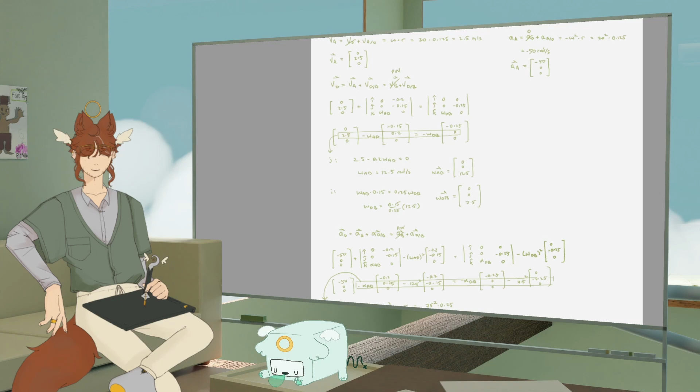Oh god, I went to go switch my scene and I almost turned off the stream. Oh hey Skrybl, what's up? POV: I legit just opened Twitch to see if anyone was on. You can always count on that.

3 p.m. damie stream, classic damie moment. Me going, I'm gonna stream at 2 today, and then I'm like, no it's gonna be 3 p.m. Whoopsies. That's why I don't have a stream schedule. I'm normal. Anyway, sorry for the green, the universe foretold it, that was my magic, I was casting magic.

I was doing this problem earlier because I goofed it really bad. Well, I didn't goof it that badly on my exam, but when I was doing it I was like dumb, or okay, dumb is maybe mean to myself, but I made a bunch of reading errors. I was reading it like this, setting up equations, and I was like, what was I doing, dude? Anyway, I did it, I think it's 175. I don't know if it's right or not, but I think it's that.

Anyway, that's not what we're doing, we're not doing green today. We're gonna do work and energy, which is fun, it's exciting. I think I'm gonna use like a brown pen. I'm trying to use more fun colors because I've been only doing like gray, that's boring. I can have any color I want, so we're gonna do that.

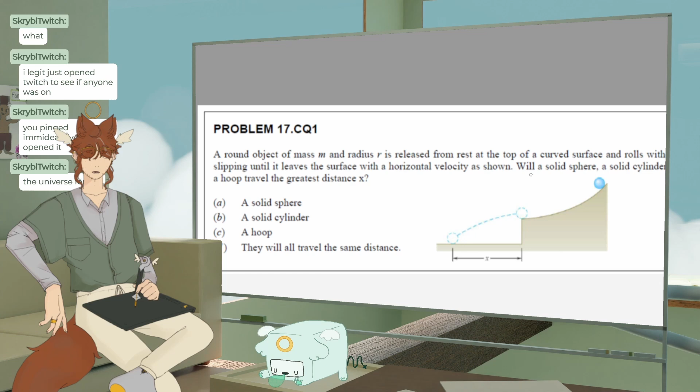Okay, so this is a question about moment of inertia. There's a couple things we need to know. There's going to be work and energy, so let's just write out the work and energy equation: delta T equals delta Vg plus u 1 to 2.

So there's no, oh god the battle music, there's no spring potential, right? No elastic potential, so we don't have to worry about that.

And we start, so let's just write this out: T1 plus Vg1 equals T2 plus Vg2 plus u1 to 2. So in terms of if we have different equations here, these are both going to be the same.

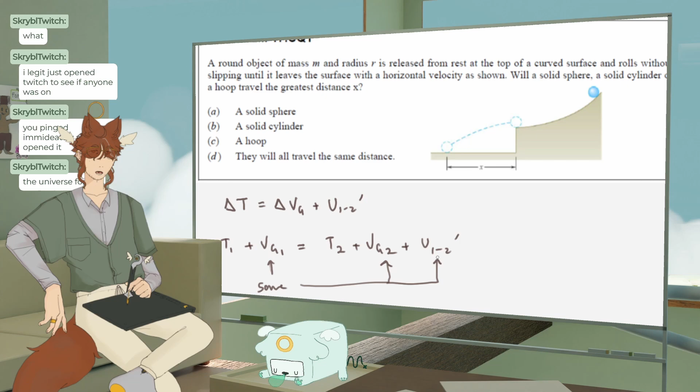This is going to be the same because they're just based off of mass, right? And they say a round object, so they have the same mass, all of them. And because they have the same mass, the friction is also going to be the same. We do have to know that there is friction because it rolls without slipping. That's the key bit there, because if it's rolling without slipping, it means there has to be friction.

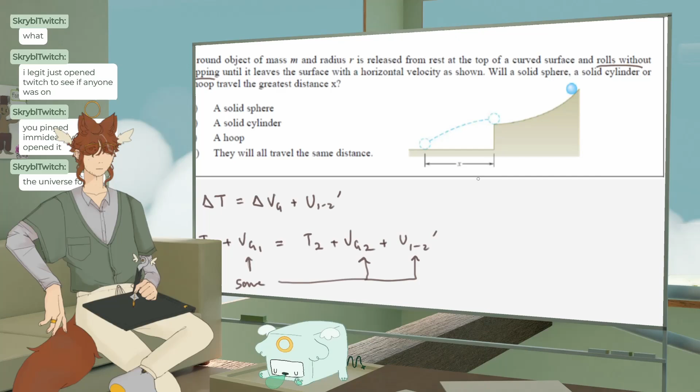So that means that leaves us with T1 plus, like, C equals T2. That's an I, T2, that's a C. What am I doing, writing. There we go. So T1 is going to equal 1/2 m v1 squared. Well, this is 0, okay, don't worry about that. So we have T2 equals C.

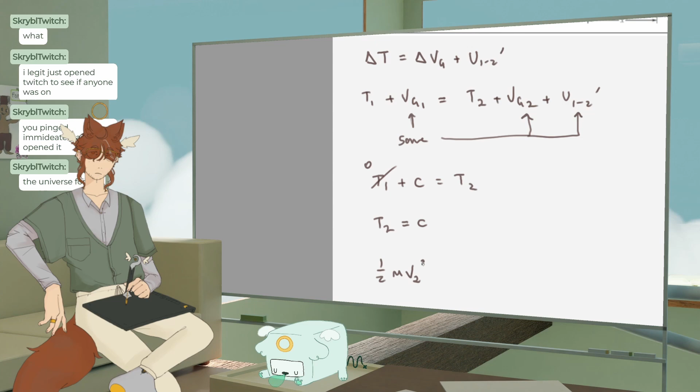This is our comparison, so whichever has the biggest T2 in terms of variables is gonna net us our thing. So we'll have 1/2 m v squared, v2 squared, plus 1/2 I bar omega squared. Let me check that.

Immediately an issue, I don't remember if there's an alpha in there. I want to say there's an alpha, I want to say it's I bar alpha omega squared, but I know there's an omega squared. This is like 1/2 m v squared.

One second, I'm checking my tome of books. Where are we at? I'm looking with my big eyes. No, it's just I bar alpha... I bar omega.

Yeah, because we don't actually care that much about accelerations in work and energy. Well, okay, maybe that's a lie. Yeah, no, that's kind of true, we care about velocities. Okay.

So these are all going to equal each other. So let's just say v2 squared equals... my mentality: if a program has been made to calculate this, use that. If not, make the program.

I made a program to help with this, it's really easy to make because it's just like algebra. I just use MATLAB and you can put in equations and stuff. But you still have to identify all your variables. In this case, this would probably be harder to do with a computer than doing it out, because you would have to do all this anyway to see what it would be.

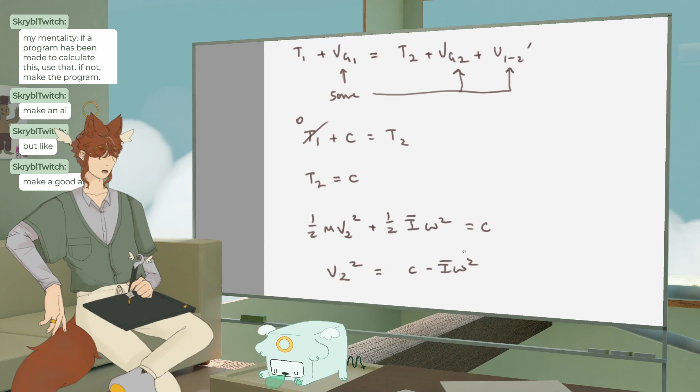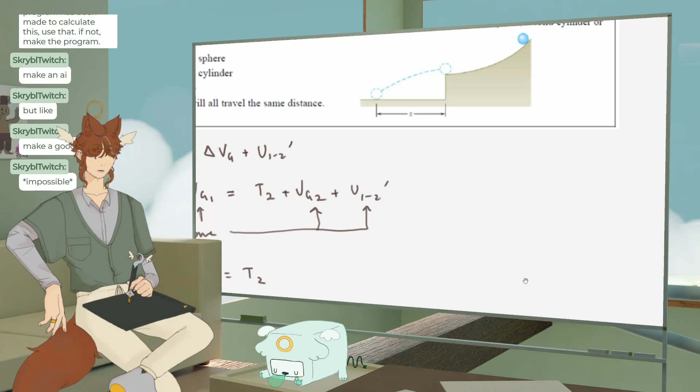My hot take: as I bar goes up, V goes up, V2 goes up. So I guess we just need to figure out the biggest I bar, which I think is solid sphere, solid cylinder. So I bar sphere.

I think it's the hoop. Impossible - AI is just not good at doing... the way that our AI works now, is this multiple choice? Yeah, you still have to prove it.

Let's see, solid I bar for a solid sphere - oh, what is it? 2/5 mr squared, 2/5 mr squared, and then I bar for a cylinder, I think is...

1/12 ml squared. Ugh, wait, we don't know how long the cylinder is. I get one mark on this test.

Oh no, the whole thing is not multiple choice. On the actual exam for the final, there are some multiple choice questions, but they're mostly conceptual - something like this is like a conceptual question.

For a solid cylinder, I think it's dependent on L, which is not particularly fun. Oh no, it's MR. Whew.

Okay, so 1/2 mr squared, so that one's bigger, and then I bar for a hoop, right? I already forgot, what was the third one? A hoop, I'm pretty sure it's a hoop.

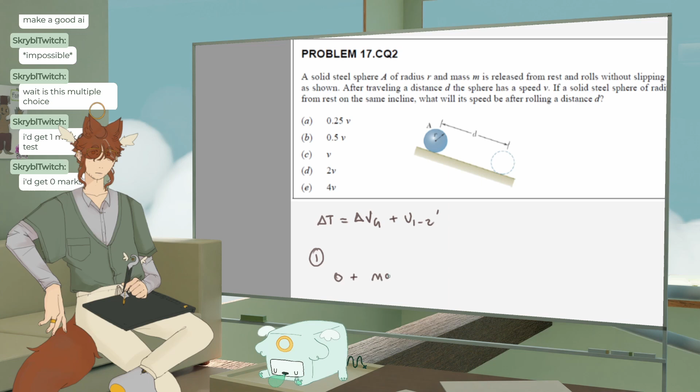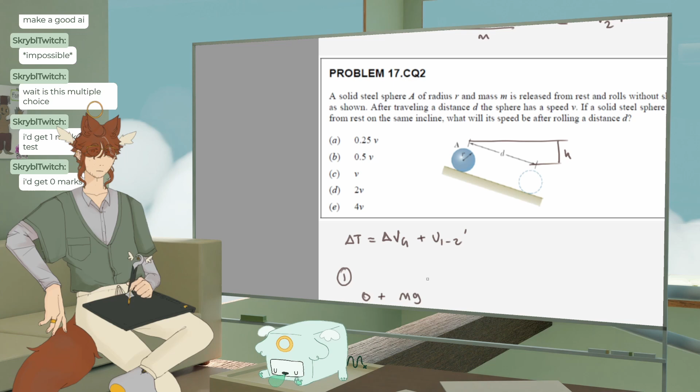Okay, for case 1, let's start with that one. So it's 0 plus mg. I'm gonna define something as h because we're gonna compare these, so it doesn't really matter what the height is, it just matters that they move the same height. Equals, I'm gonna put my datum here.

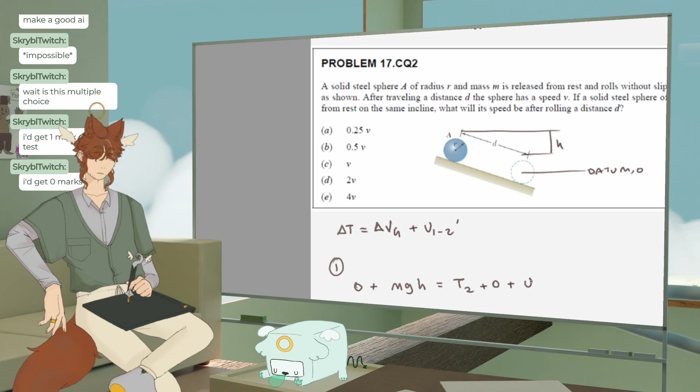So then we have 0, we have t2 plus 0 plus this. So u1 to 2 prime is going to be based off of... let me write out t2 a little bit more. This will be 1/2 mv2 squared, 1/2 mv. Okay, so this is v, right? So it has a speed v.

V squared plus, and the I bar A is also going to be the same, but that's... no, it's not, I lied, don't listen to me. 1/2 I bar A omega squared, omega squared is going to be the same. Okay, so now if we compare to 2, we'll have mgh equals 1/2 m vb squared plus 1/2 I bar B omega squared plus u1 to 2.

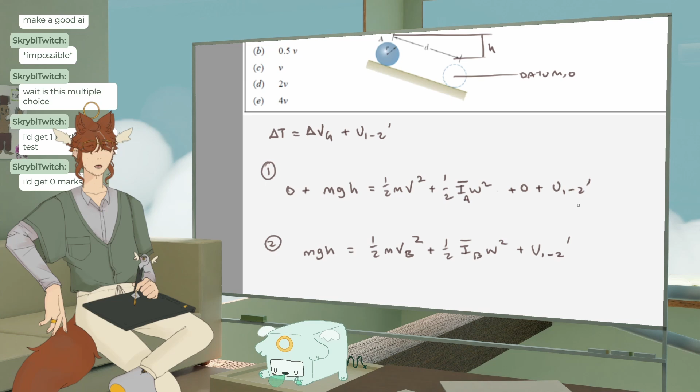So all the things that don't have subscripts on them are the same, because they're going to move the same distance, they're going to have the same friction. Actually, wait a second, no, it's okay, it has the same mass.

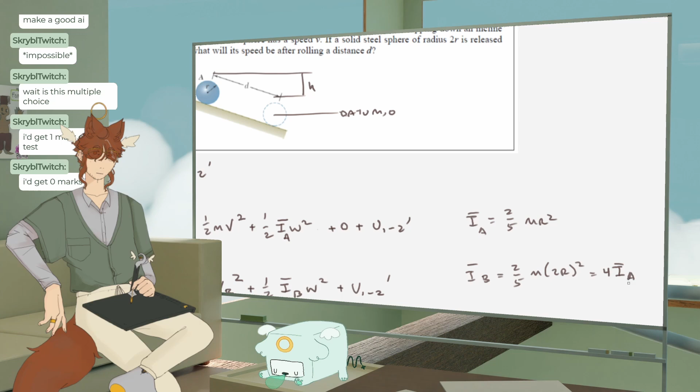Okay, so we know that the I bar of a sphere equals 2/5 m r squared, so I bar A equals that. But I bar B equals 2/5 m 2r squared, equals 2/5 times 4, I bar A, right?

So the idea is that the difference in the velocity is going to equal... we say 1/2 mv squared minus 1/2 mvb squared equals the difference in the I-bars. So it's going to be, I guess, 1/2 times 3 I-bar a omega squared.

Okay, I can get rid of all these, and I can't get rid of the m's. That's going to be v squared minus vb squared equals 3 times... okay, so now the weird thing is the omega is going to be the same. Oh, but we can turn that into v over r. Oh, exciting.

This is a little jank, I might have to redo the math on this one depending on how this shakes out. Okay, so I bar a is 2/5, and it's going to be r squared because I got rid of the m, and then we're going to multiply that by v squared over... okay, omega equals v over r, so v squared r squared. We're still okay, but it's not great. No? It's okay, I think. So we get vb squared

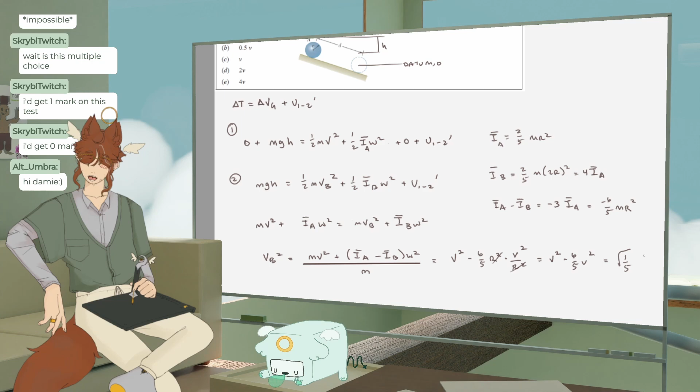In my brain I'm like, wait, okay, what if I don't... What if I just said it was 4? Because then it would be square root of 1 over 4, and that would be 1/2. You know? But I feel like that's...

Because I bar A minus... wait, that'd be 5. Wait a second. Wait, am I? Wait. 2, 8... no, I didn't subtract wrong.

Oh wait, it's B minus A. Right? No wait, it's not. It's A minus B. What? Also, I don't think that would change anything, it would just make it positive.

What is... I feel like it's supposed to be 4. Like 4 is this thing we're supposed to get, not a... What if it was 1 plus that? That'd be 11 over 5. That's also not the correct thing.

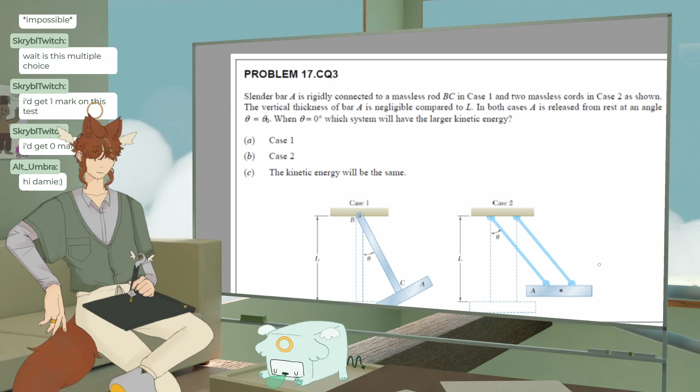Okay, it's about centroids. So this centroid is at... I don't know. Gotta do some math, let's see.

So it's gonna be cos theta. Let's call our datum here, because I don't want to do more math than I have to. So this is gonna be...

Let's just say for argument's sake that this is the length L. Let's say this is like a line with no thickness, so we don't need to add thickness. So L cosine theta is the gravitational potential there. The centroid's here, and this is also length L. I think it's the same, I think they would be the same.

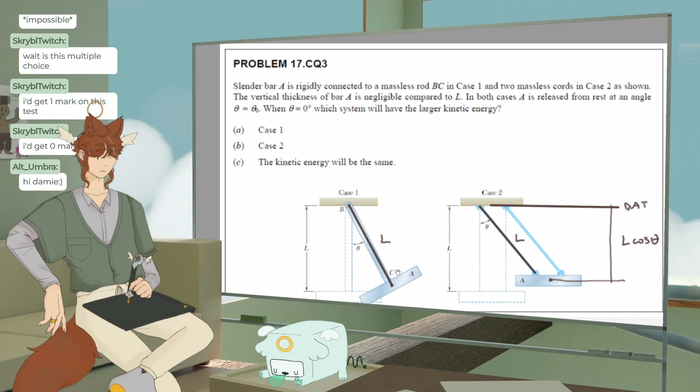It's a massless rod, that's the thing. If it wasn't massless, the centroid would move up a little and have more kinetic energy, but they're both being lifted to the centroid. If we assume the centroids are the same, in this case it would be L cos theta, and in this case it would also be L cos theta.

Plus, we'd say this is d over 2, so d over 2 cos theta. That would maybe be bigger, but actually no — it says it's a slender bar, so the vertical thickness is negligible. That would be the case if it wasn't negligible, but I think it would be the same.

Unless — well, what else would you have in terms of energy? They're both released from rest, so that's 0. Gravitational energy is what it is. Is there work being done on it? Wait a second, there might be work being done on it. Let's think — oh, also maybe I bar is different.

Oh wait, no, you know what it is? One's rotating and one's only translating, so... okay. But it's asking about larger kinetic energy as a whole, not larger rotational kinetic energy specifically, which they would have the same amount of. But if they asked which has larger translational kinetic energy, or larger velocity, case 2 would be higher because it's not rotating, so none of its kinetic energy is lost to rotation. Whereas for case 1, some of it goes into rotating the bar.

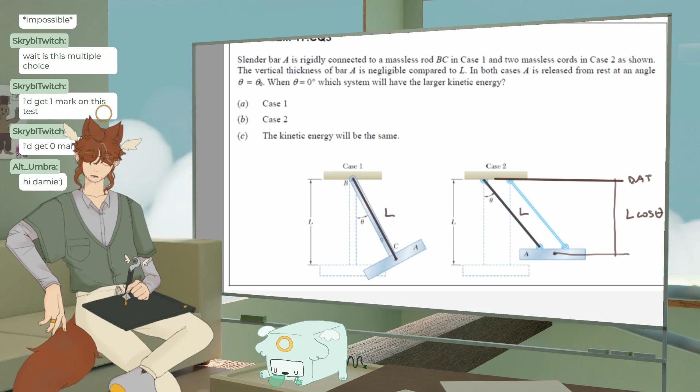Wait, but it's fixed axis rotation, so is it translating and rotating? Let me think. Oh, that's what it is, because case 1 — okay, so for case 1, T equals 1/2 I omega squared. For case 2, T equals 1/2 mv squared. Oh, they're sneaky. Okay, so this equals — I'll put it in terms of v. So the slender bar moment is 1/12 m L squared, which would give us v squared over r squared.

R is L, I guess, L squared — oh no, I can't use L for both. Wait, what is the length of bar A? I guess it doesn't really matter. It kind of does — they both have the same length, but this one isn't dependent on length. It kind of does matter. Wait, slender bar — yeah, it's based on the length. I'll call it L like this.

We'll call it L like that, so this is gonna be 1/24 v squared — the m's cancel. Let's say T1 to T2, that's 1/24 little L squared over big L squared, and on the bottom we have 1/2, and everything else goes away. I guess I should say v1 — yeah, the v's aren't necessarily the same. So little L squared and big L squared, then v2 squared.

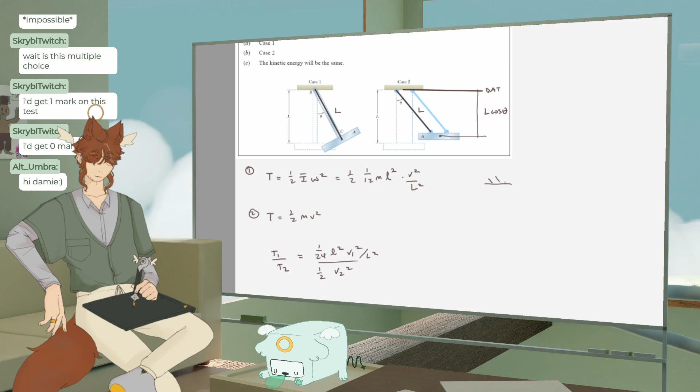I know my I-bars, this is so funny. Wait, so if you had this - okay, you had really short ones, and you had like a long bar like that. And then a really short one, and a long bar like this - it's gonna rotate a lot more.

Wait sorry, not like that. Like this. Wait no, sorry. I'm trying to draw this correctly. Like this. It's gonna rotate that much, which is like a lot of rotational kinetic energy.

But it's not gonna have that much. I feel like this is... I guess we kind of just have to go with the case that they gave us, which would probably be case 2, because it looks like L is longer than little l.

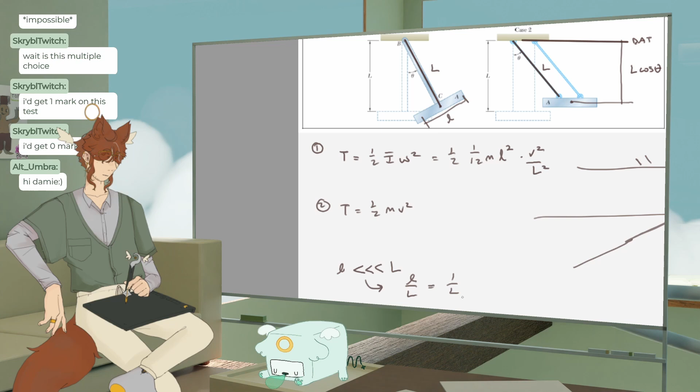Let me also define this as little l. Then this number would be - so if L, let me do this - little l is considerably smaller than big L, then L over L equals like, okay, we'll just say like a fraction, 1 over L. I mean, it would equal 0.

Really? Why is my music stopped? Is this blocking? Yes. Hating on me.

It would equal 0 if the length was too long. Wait, does that make sense though? I mean, no, because like, but it's still gonna have...

Oh, because they both have gravitational potential, which is the same, and it's getting turned into this. So it can't be 0. That would just not be possible. It would be like very small, 0.001 or something.

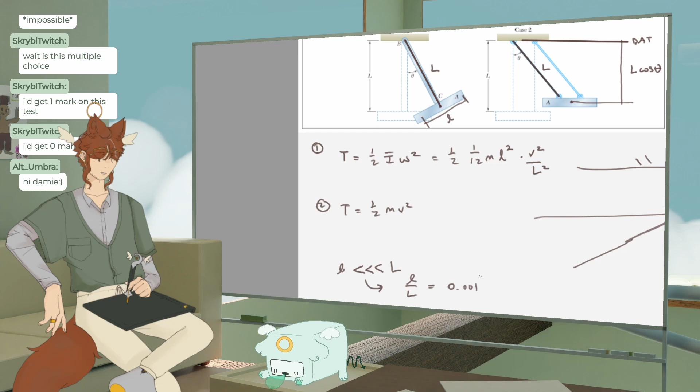I'm gonna say case 2 because I feel like that's where we get with that. But the second one, I feel like that's important to note. Unless I'm just missing something. I'm probably just missing something about it.

Wait, let's see if we can find this, because I'm actually interested to see if I'm missing something. What was this? What does this say? Let's see if I can. Okay.

Cords in case 2 as shown, it equals 0, which will have the large.

Okay, that was like a lot of typing, I did not need to type that much. Let me see if I can just actually snag it.

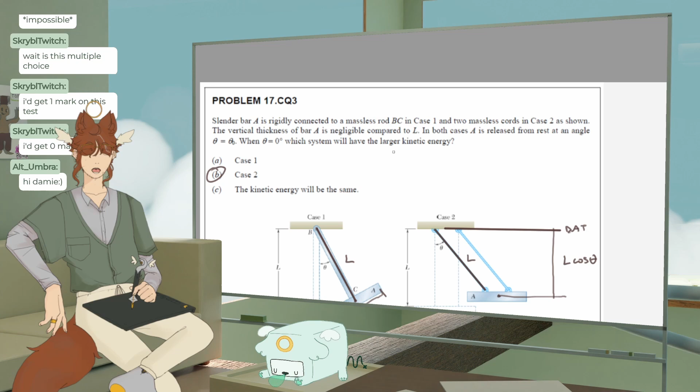I just found whether the velocities would be bigger or not, right? Bro, the whole kinetic energy just equals mg. There's nothing else for - oh my god, oh my god, oh my god, I'm going insane.

Okay well, I figured out the velocity thing. No wonder it didn't make any sense why they didn't give us any lengths or anything at all. Oh my god, I hate everything. Oh okay, peace of mind for you guys, that's why it's that. I'm so...

That's insane, okay well, teehee. Okay wait, there's another question. Wait, that's the same question again. Wait, no it's not. Oh. Wait, what?

Is this not... this is what? Wait, I'm confused, this looks like the exact same question again, but it says that it's a different question.

Oh, this is a great song. This is a different question, but there's one lower that looked like exactly the same question, but it said - I don't know - the speeds of the centers of gravity. Okay, this is what I just did.

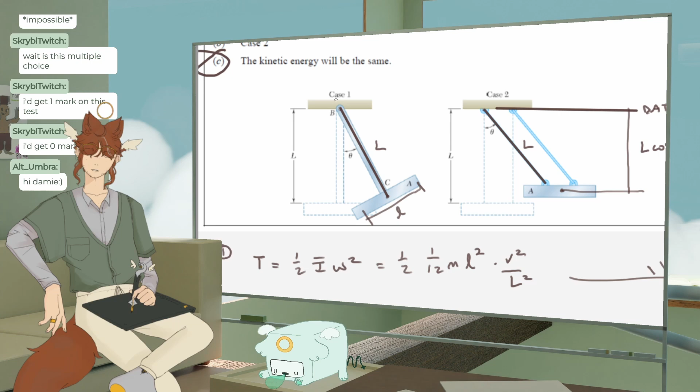I think yes, because if you have... it just feels weird because you're including omega twice. I mean, I get why, because the energy's going to rotate it. But in your V, you have V equals omega R, so it's all from omega.

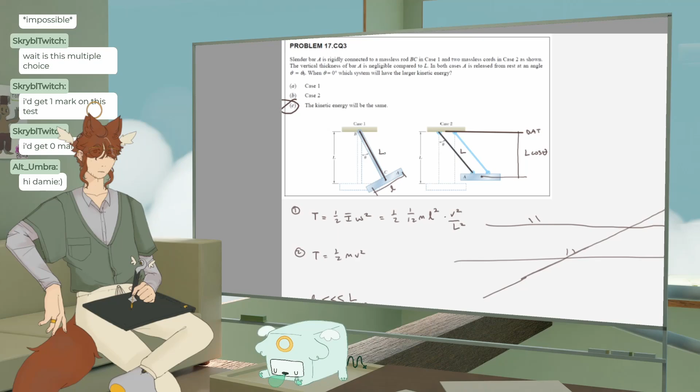So yeah, it has... let me write a little note in the margin here. Fixed axis rotation equals has TL, I think I'll know what that is, and rotate. Odd.

You wouldn't think it does, but I guess because if you're just moving in one place and not changing your center of gravity... oh, that's what it is. I'll say pure rotation, like a pin here. Pure rotation equals V for V equals 0.

But if you're swinging about something, right, this is rotation plus move, or plus TL. That would have been nice to just say at some point when we did this, but okay. It's not that hard once you think about it for a little bit, but I put the cart before the horse a lot in dynamics. You know how it is.

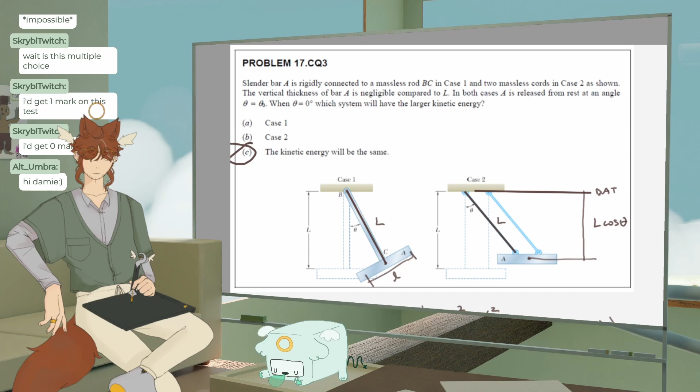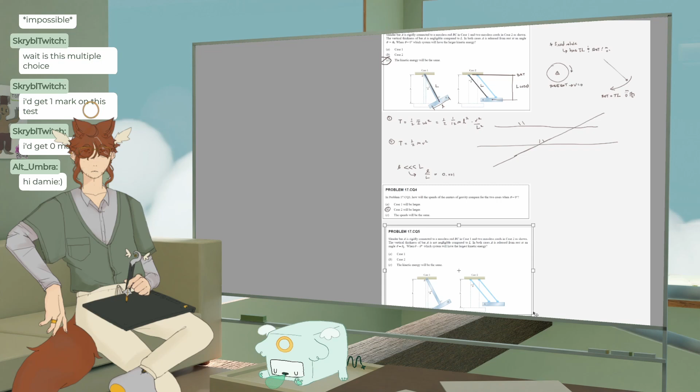Which system will have the largest kinetic energy? Okay. Wait, it's released from rest at an angle of theta naught.

What? How would it get up there is the thing. Is it just being picked up? I mean, I guess we say... have 0, 0 equals, is it not the same thing? Maybe because if it starts at 0 and we just go up, they're both...

Well, which one will have the largest kinetic energy? How does it get up there? Wait, what? I'm just confused. Oh, maybe... oh, when is it like swinging past, maybe? Maybe that's what it is.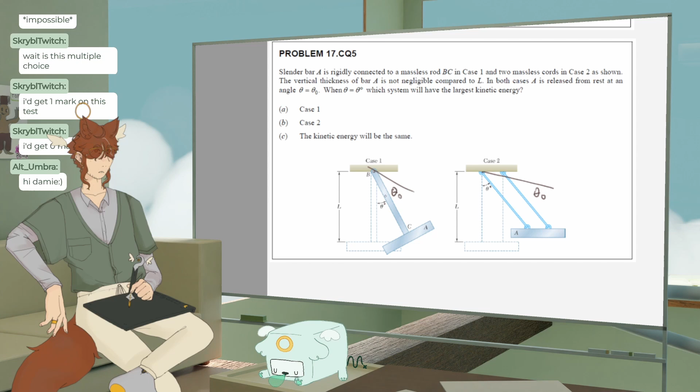I mean, I guess there's tension in both of them. Oh, is that why? Because the work done is larger, but that doesn't make any sense. They're not the same mass. I don't know, let me see.

Let me see if I can figure out what they're trying to say. What? Wait, I'm losing my mind. It's saying it'll have a greater change in gravitational potential energy. Why would it have a greater change in gravitational potential energy? Oh, is it because I'm just doing my... this is L, and this is L.

Okay, I don't see how they would have a different change in gravitational potential energy. Oh wait, it's not negligible. Oh my god, okay, well we did the math for that. That's d over 2 cosine theta. Oh, that'll make it smaller, and then it'll have... okay, fine.

Case 1: it's L minus L cosine theta, minus... oh sorry, theta not. L cosine theta, plus d over 2 cos theta. Not, and this is L cos theta. Loss L cos theta, not minus L cos theta. That.

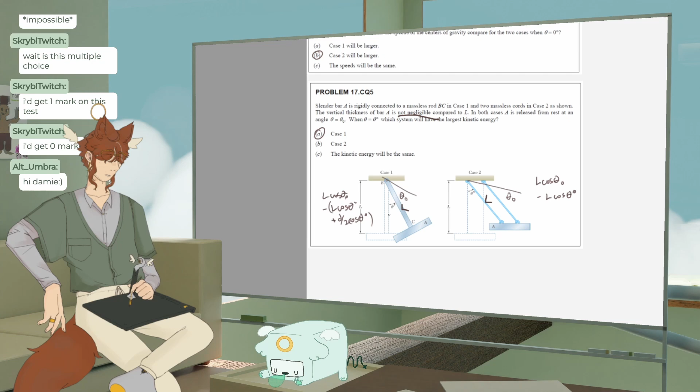Is that right? Actually, wait, let's see if the math is right. It would be L cosine theta for the first one, and then minus... no, it would be L minus L cosine theta. Or wait, no, let me make my datum the top.

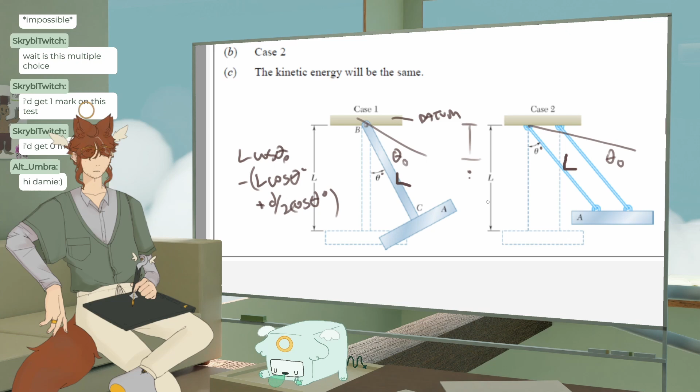So if we say this is the datum, how far this is up here would be here, so that's L. L cosine theta. Wait, is that cosine theta or sine theta? It'd be cosine. Okay, cosine theta, so this one would be L cosine theta plus a little bit, which would give a bigger change. Yeah, that's what it is, a bigger change in potential. And then the signs would work out so that it's like a negative velocity or whatever. Yeah, good, okay.

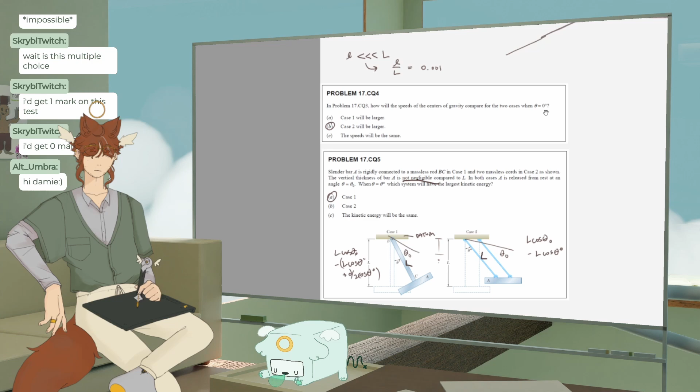Man, that's so annoying. They switch one word, and I'm like, it's the same problem. Fine, alright, finally an actual thing we can do. Actual problem, let's see. Oops, there we go, alright.

Disk A is at rest when placed in contact with belt BC, which moves to the right with a constant speed. Knowing the friction value, determine the number of revolutions executed by the disk before it attains a constant velocity.

Okay, woof. So what are we trying to find? We're trying to find like a distance, or like a theta, which I guess we can figure out by kinematics after we get a velocity, because once we know the constant velocity... ooh, this is a lot. Okay, well, what do we start with? I guess different states, that's a work and energy thing.

So the first state is gonna be, I guess... oh, but also, what do we include in this, oh my god. It also gives us a weight, which makes me think we need F=ma. Well, I would assume maybe the first state is zero, state 0. Yeah, let's start with that. Oh, no, you know why it gives us the weight? We do need to do F=ma for the friction.

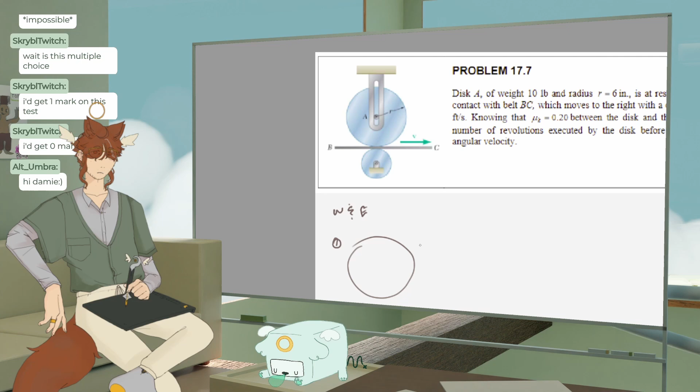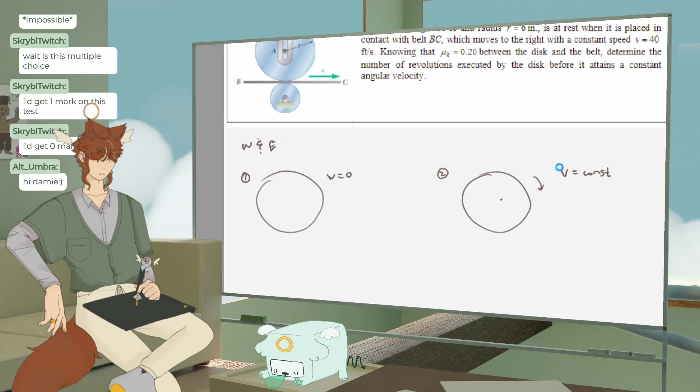That's fine now, we don't have to worry about that, or I mean we'll get there. So work and energy, so state 1, V equals 0. State 2, V equals constant. Alright, so how do we get from state 1?

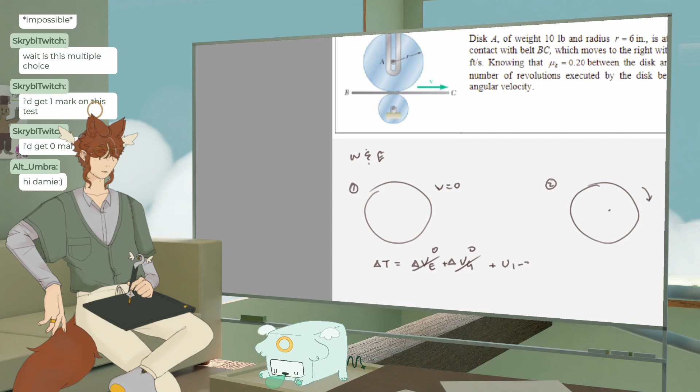So state 1, delta VE is not gonna do anything, delta VG is not gonna do anything. U1 to 2, friction is gonna start this thing moving, which makes sense. So T1 plus U1 to 2 equals T2. And U1 to 2 is going to be negative.

Is that true? No. Maybe. U1 to 2 is going to be, let me think about that. So if we have T1... no, it's going to be positive if it's over there, but it's going to be negative, and then we'll have... that's a little weird. I'm trying to like force a sign on this thing that doesn't want to be forced.

Let's see, so T1 is going to be 0. I mean, T2 is going to equal U1 to 2. Doesn't really matter the sign right now, because we'll have to figure out the velocity and stuff, like which way it rotates. It's not like it's gonna pull this way, so it's gonna rotate this way, right? Also, it's gonna be pure rotation, which is exciting.

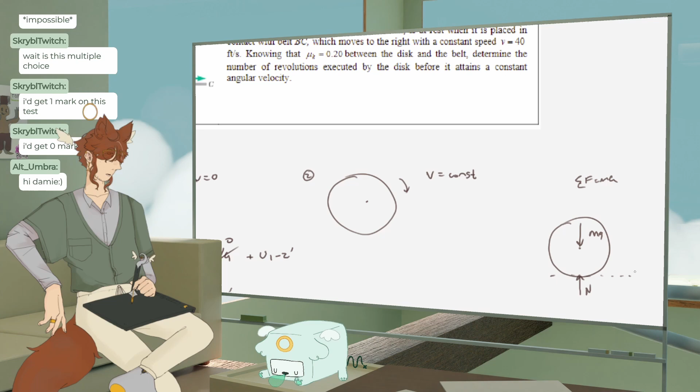And which way does the friction go? Let's try and see. We have a force pulling it that way, so the friction has to pull it this way. Is that true? Actually, I'm not sure. Wait a second. Would that be true? If I had something moving this way, let me figure it out. No, I think it's gonna go the other way. No, it's rotating down, it's rotating down. Like taking my pen and moving my hand, it rolls down. Yeah, so it's gonna pull. I mean, the only way you can do that is if it's traction, FF. That's the only way the friction can move it forward. And then this is the mg.

I'm just gonna assume I bar. No, I'm gonna not assume that actually, because we do - wait, no, it is this way. Wait, what am I doing? It is this way. It's rotating that way, it's got to speed up that way.

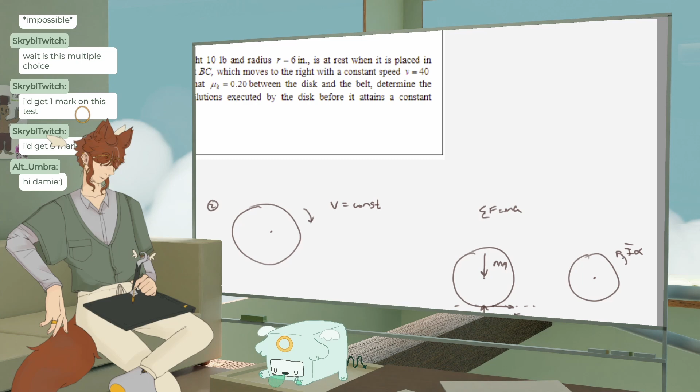Do we say? What do we say? Oh god, okay. Wait, but there's another - oh, sum of X is 0, that's the thing. And sum of M is 0. There needs to be some sort of... No, I think it's okay that we don't have those, because we're gonna say that FF equals the moment, FF equals alpha. But I feel weird that we don't have another force opposing it, so there's a normal force. This is like normal pin, this is normal belt.

Okay, sum of forces equals 0. We have NB minus mg equals 0, so NB equals mg. And then we have the moment about g equals I bar alpha. So we say FF times r equals I bar alpha. That's mu sub... k? No, s. That would be, actually, I don't know what subscript that is. Can anybody read that? I can't, it's a weird pixel count. I think that's a k. So mu sub k N r equals I bar alpha, which is mu sub k mg r equals I bar alpha.

Equals, what is this, a disk? What is a disk's I bar? I don't know off the top of my head. The disk, homogeneous disk I bar - area moment of inertia. I'm surprised that I bar is... oh, it's 2/5 mr squared. Okay. Good, we can cancel out on r, we can cancel out on m. We have mu sub k times g equals 2/5 r alpha. I like that.

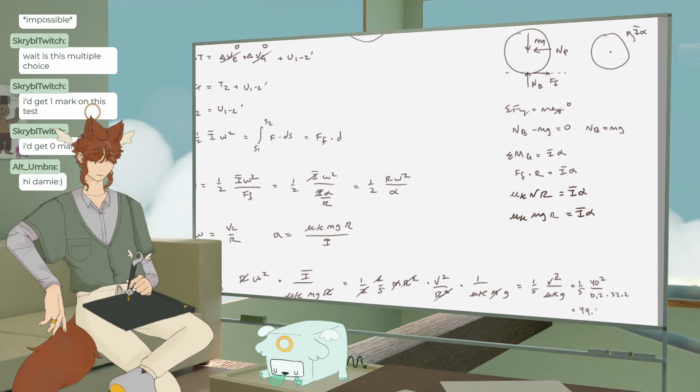40 squared, divided by... okay, 49.6. And then we just have to turn that into rotations. 0.69, nice.

Then we have to say the revolutions of the disk. Okay, radius is 6 inches. So rev equals 2 pi r, equals, let's see, so that's pi feet, it's kind of nice. So 49.68 divided by pi equals - please be right, please be right - 15.81.

Oh no, rev. There we go. Perchance. I feel okay, 19.77, it's close.

What could we have done wrong? Let's take a look. Okay, let's check this first.

Ooh, I watched a couple movies today. What movies did you watch? I've been watching Hadestown in a completely legal manner, definitely not on YouTube, and you should go watch it because it's really, really good. I have all the songs stuck in my head. Poor Things by the Lobster Guy, and Gone Girl, and Damsel. The Lobster Guy? Who's the Lobster Guy? Let me see - Poor Things, oh it's a new movie. Oh wait, you mean... Willem Dafoe? Whoa, that looks cool, the one where he becomes a lobster. Oh I don't know about that, I thought you were gonna say... What are the other ones? Gone Girl? Oh I know Gone Girl. Damsel, oh that's new also, that's really new, I have not heard of that one. The one where he becomes a lobster, that sounds great.

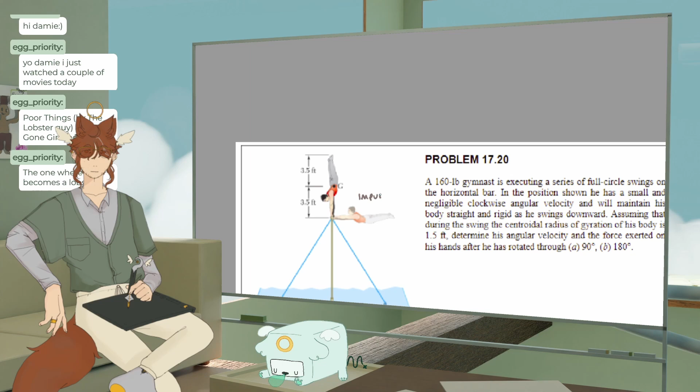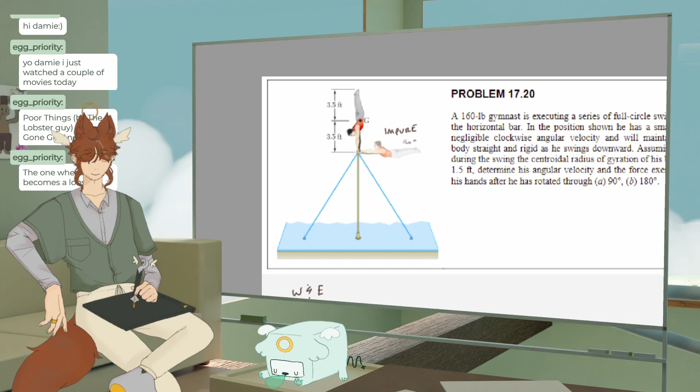Okay, so this is gonna be impure. I'm just gonna write that. Rotation. I just think it's funny. Of impure rotation. Oh, sorry, okay.

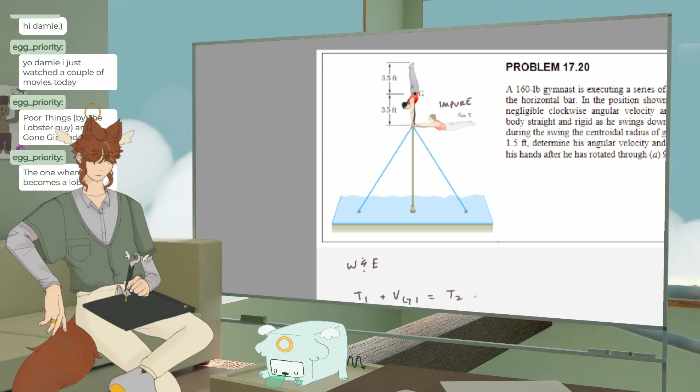So we'll have T1 plus VG1 - my G's kind of look like A's, I kind of want to change that for y'all - equals T2 plus VG2, and there's no non-conservative forces. At least I don't think, is there? Do I have to worry about the normal force changing, like an impulse? No, let's not worry about that. It's 0.

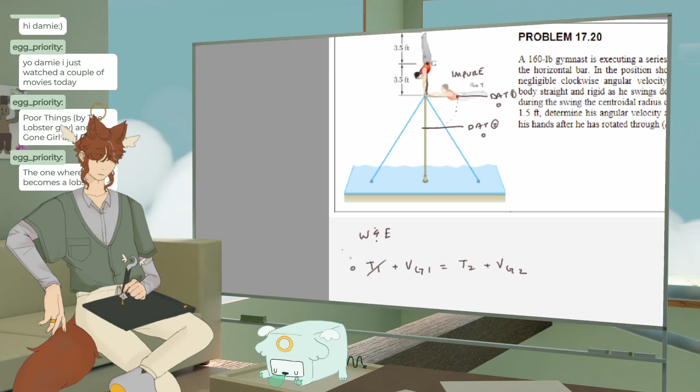Through 90 and through 180, so I'm gonna put a datum here. Datum 1, 0. And then I guess kind of datum 2, 0. This is like 1. At the top, 3.5 feet, so MGH1.

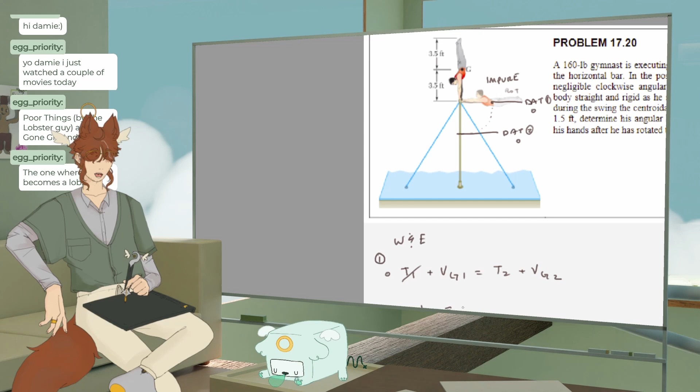I'm gonna try and solve it. I'm not even writing on the whiteboard. Wait a second, I'm gonna try and solve it symbolically. 1/2 MV squared. We are looking for the angular velocity, so omega is what we want. So plus 1/2 I bar - I'm gonna go ahead and call it k squared m, it doesn't actually really matter that much, probably won't cancel out - omega squared plus 0.

Alright, I'll do this one as 0. Oh. Bad, there we go, 0. Okay, so I could cancel out an m if I wanted to. Kinda nice.

Well, alright, what kind of stuff do we know? We know the height, so that's a known. We know I bar, so that's a known. We don't know the velocity, though, is the thing. Which is... we're gonna have to figure that out through... oh, well, we can just say v equals omega r. So, is that true? Let me think. Yes.

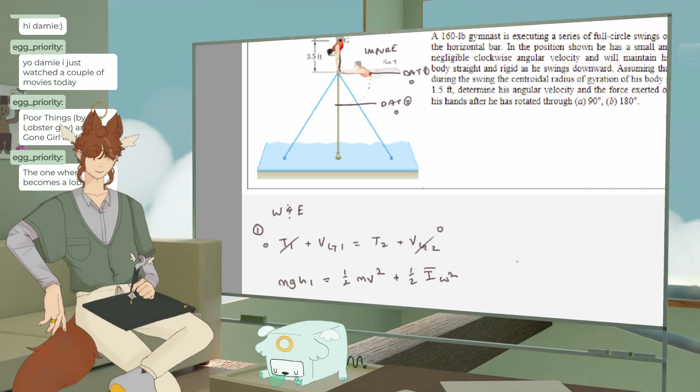Okay, that's at the beginning. Wait, why is that? 3.5? Oh wait, no it is. Okay, yes, they literally said that it's always V no matter what. I'm not sure about that pin problem, that pin problem is a little wacky. But V is always going to equal omega r, is the thing.

Right, unless it's for pure rotation, fixed rotation is the word I wanted to use. Okay: mgh1, 1/2 m omega squared r squared plus 1/2 I bar. I'm going to pull out the k squared m. We can just get rid of the m's, and we can pull out an omega squared.

Omega squared times r squared plus k squared equals 2gh1. Omega equals square root of 2gh1 over r squared plus k squared. Is that right? I think so. Maybe, I've got to plug stuff in.

2 times 9.8 - not 9.8, I lied, 32.2 - times 3.5 over... oh, I guess this is actually r. Not that it really matters, it's not something we can cancel out. It is 1.5 feet. If this is wrong, I'm going to be very sad.

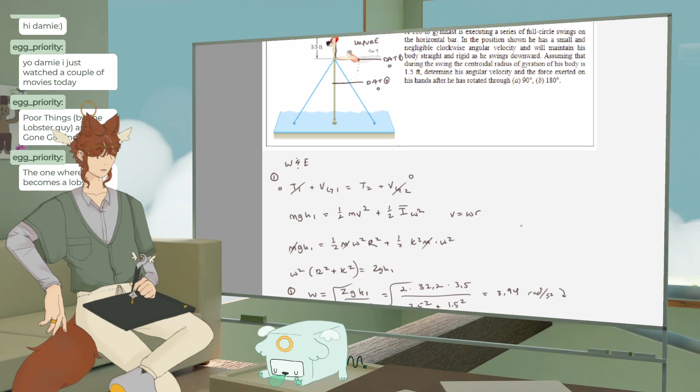Okay, the force exerted on his hands - we need an angular acceleration for that. I think there's no... there might be tangential. I'm trying to think about how we would get that, because we'll need an I-bar alpha.

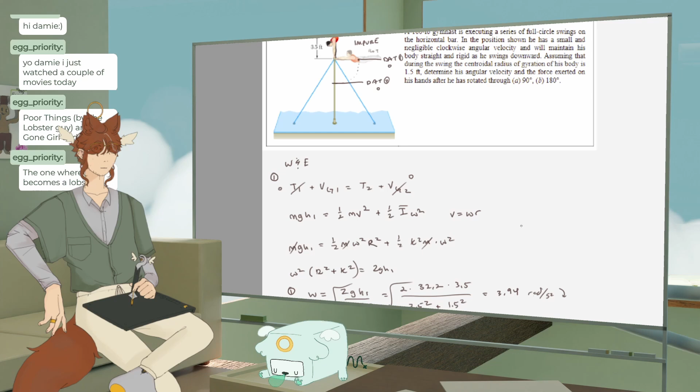Yes, yes, yes, very good. Yes, okay, no, let's just dig around. I'm going to draw a guy, that's fun. Here's his hand. Draw like a really decent, okay hand, and then just like... I think that's perfect.

That's not even... I need to tilt him. We can do the thing, guys. Look at this, how do I move just the center? Oh, there we go, look. Okay, this is the simulation of this problem.

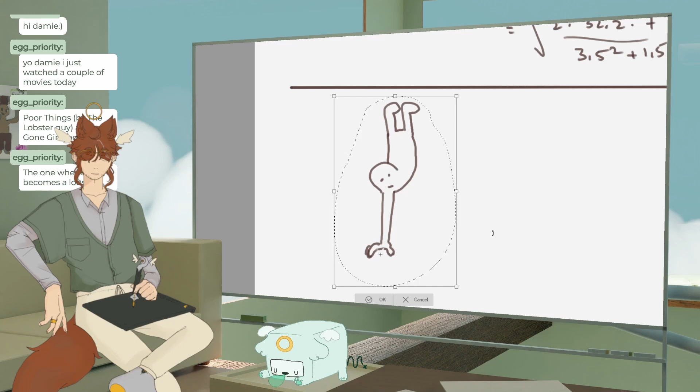Ready? Oh, he's over. He's going, he's swinging. Oh, he's down. Oh, he's going to come back up. Oh, he's breaking the laws of gravity. Whoa, oh, he's going everywhere. Oh, okay.

Sorry. Having a normal one today. Okay, oh no. Escape, there we go. Where's the center of gravity? I feel like right here.

And then we have a normal force, I guess. Oh, he got core strength. Have a normal force on his fingies.

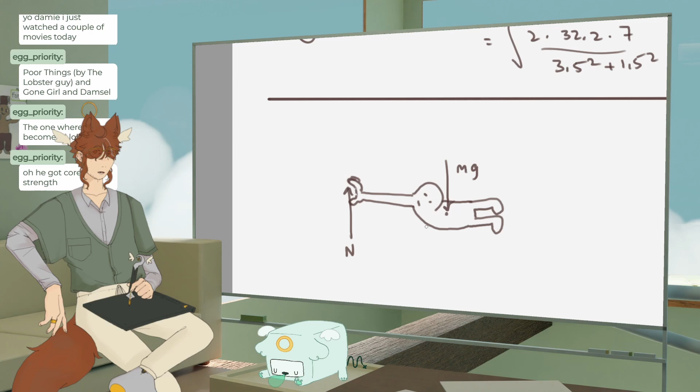He's doing a flagpole with one hand. That's really impressive. I don't even know if that's possible. Because you'd get a moment if you did it like this, wouldn't you? Since you only have one force, you'd need a couple to keep yourself balanced. I don't know the dynamics of this guy.

What if I gave him toes? Okay, no, stay on focus. Yeah, somewhat on track. I'll give him a little booty. Yeah, that drastically improved this problem. Is there any other forces? I feel like there's no other forces.

Well, this isn't... oh, he has acceleration. It's like this problem... oh wait, I have to draw him again. Okay, we're gonna try and... uh-oh, his hand... uh-oh.

This is guy 2. That's the FBD. We need the MAD.

There's his butt, and his legs. Okay, his butt is a little bit bigger. I don't know, I have to draw the MAX through his butt. Here we go, MAX. MAY. I-bar alpha. There he is.

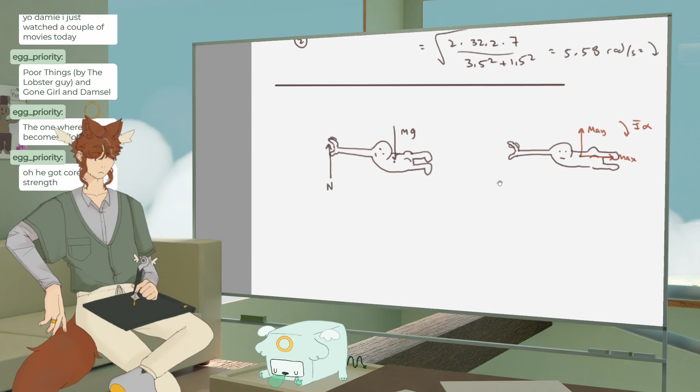Mr. Angular Acceleration himself. Okay, well, this is not entirely helpful. Oh, I guess MAX equals 0. That's helpful.

Okay, I should say the sum of forces. Sum of force in X: MAX equals 0. I mean, unless there's a normal force... I mean, there wouldn't really be a normal force to the right, right? Because he's not accelerating right or left.

Well, actually, he would be, right? Because he's not accelerating right or left, but he's accelerating like to the center, because he's turning. I think there might be a normal component here. I think there might be, because otherwise how would he not... well actually, no, there has to be, because he's accelerating to the center, and that can't come from nowhere.

Wait, I'm thinking in my brain. No, okay. He has an alpha, an angular acceleration, which is taking care of the omega in terms of the acceleration of any given point. But I don't think you need the normal force. I don't know, it seems redundant to me.

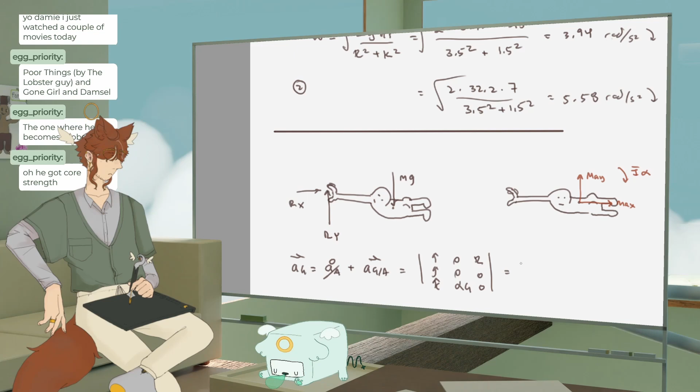They got on me, they got me so bad for not putting vectors on everything. Generally I tend to label in a way where it's a vector until proven not, unless I'm doing something like this, where I was mixing it - not doing it as a vector here, then I started working with vectors, so I write the notation. But if I'm only doing vectors, they're all going to be vectors, I'm not going to say vector on each one. That's silly to me. Anyway.

Okay. Yeah, negative. Okay, so then we have to do... wait, but then it's just saying AX is nothing. Am I goofing? Yes, I am goofing. There's an angular velocity - minus omega squared, minus omega squared. Oh, we just found omega.

I say negative alpha g times... that's not that helpful, I'm not gonna say that. I'm gonna write it like this: we're gonna write it like this. Negative r is 0 minus omega squared. R is 0, 0. And then we say a big one where we put it all into it, and I fix the signs: alpha g, 2 alpha, r alpha g. 0, don't know why I did that. Negative omega squared r. There we go.

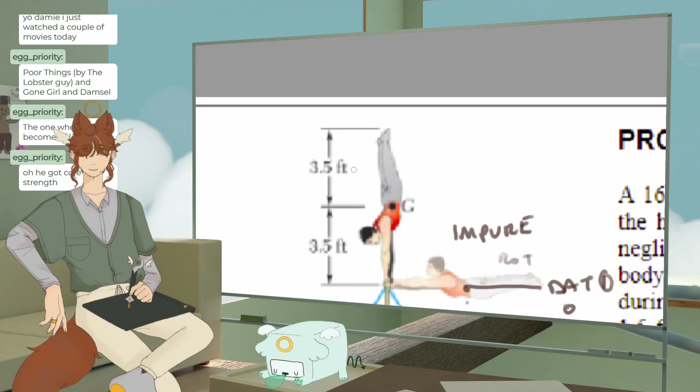I think the 3.5 is not gonna be an issue. Why did they give the distance to his other? They gave 2 - oh, you guys can't see that, I'm looking at this - they gave like the other 3.5. Oh, probably for the bottom. I was like, why do we need that? That's interesting.

Maybe it's this, maybe it's this. So I bar alpha G. No, but it shouldn't matter because it's our MAX. I don't... wait, is it right? There's no way it's right.

I might have just had a sign, like a little thing, like a whatchamacallit. Maybe I just got it - did I put in a 0 somewhere is what I meant to say. It's 35? Wait, did I just say 35? Well, we found the issue, folks - I multiplied it by 10.

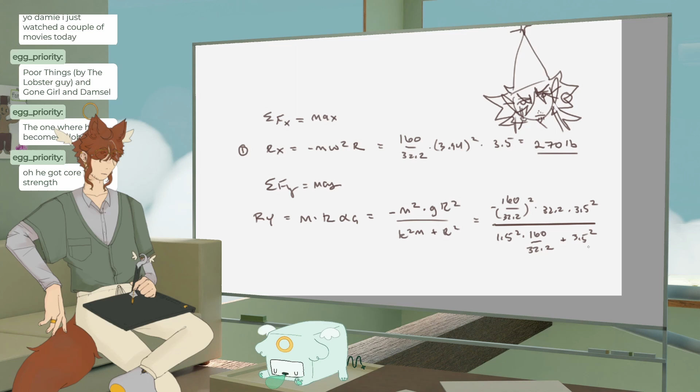160 divided by 32.2 squared times 32.2 times 3.5 squared. This one is a big number. Okay, that's a little big, I think. 415? Okay, it's actually not that bad. I don't know why I added so many significant figures there. 416 is fine.

Like past that point, you're getting into the thousandths of an inch, and we're not manufacturing stuff here.

Okay, so it's not that. Oh, it's because I forgot the weight. You know, classic. You know me, just not looking at things and just not writing things down correctly. That's why I feel like this. Here, we'll do that. I feel like that better encapsulates my feeling than a tier.

It's more just like me being like, here, wait, if we did this and this. There we go, now it's really accurate. Now I'm like mad and weirded out. Okay. I don't know if that math is right, but like 416, it's not right. I just saw what it was and it wasn't that.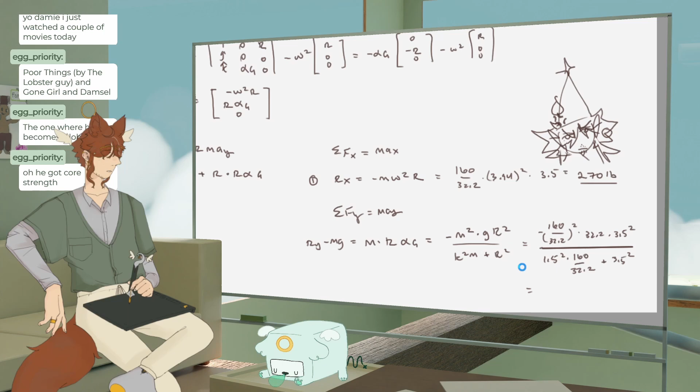Maybe I calculate this first. What is it? Okay, oh wait, MG, what am I doing? Why am I, okay. 160 times 3.5 divided by 1.5 squared times 160 divided by 32.2. Okay, I need to put another parentheses in here. Gosh darn it, gosh darn it. Plus 3.5 squared. Is that right?

Okay, yeah, 23.9 is alpha G. Oh, sorry. So then we have 23.9 times 160, times 3.5 times 160 divided by 32.2. 415. Okay, so it was right. And then this minus 160. But it's not going to get me what I thought it was going to get. 255? That's like big.

Oh, my alpha is wrong. Oh wait, that's for the other one. Whoopsies, I know it's not. Oh no. What's up with this? If it's positive, it doesn't really matter what it is. Oh, well, it also doesn't matter. It's 27. I got 29. Oh that shouldn't. Or no, I got 23.9. Which I don't know why. Where did I get alpha? Yeah, alpha.

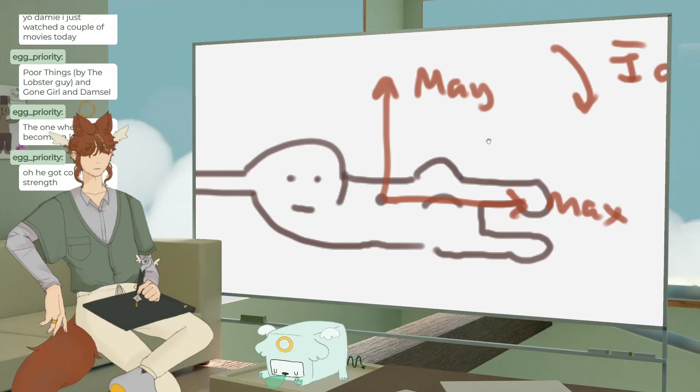A squared. Okay, that's the K squared M. Theirs are both plus. Am I saying that MAY rotates the wrong way? Oh, I guess. Okay, that's why. Because I can't say it rotates downward and accelerates upward. That's not possible. What is easier to fix? This one's easier to fix. It has to go down, which means it would be positive.

The thing is, it was still off when I did it. I don't know that. So this one will be positive, and this one will be positive. Or this one will be negative. It's the better thing to say. That's negative. Not the better thing to say, the correct thing to say. But so, why is it not right, though?

It still says 23.9. Literally doing the exact same numbers. Gamers, what is up with that? Wait, they say it's 7. 3.5 squared. Wait, did I forget an m? No, that's R squared. What's that? Wait, maybe I forgot an m.

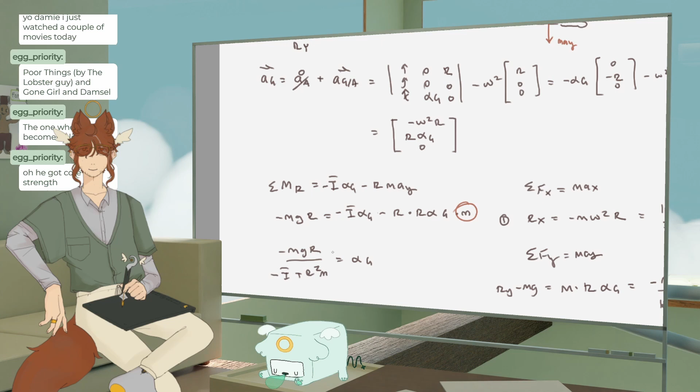Oh, I forgot an M. I literally just forgot to write the M. God. Wait, but then everything is an M and I can just cancel it out. So it's just...

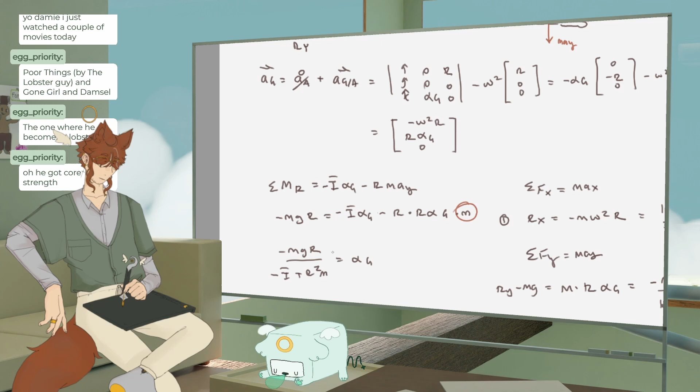32.2 times 3.5 divided by 3.5 squared plus 1.5 squared... 7.7. Okay, that's where I went crazy wrong. There we go. Okay, we figured it out. That's why this is all goofed up.

I mean, there's an easier way of doing this also. Just get rid of this and don't do this. M R equals 7.77 times 160 divided by 32.2 times 3.5. And that's going to give it to us. And we've solved the mystery.

Yes, minus 160 is 24.4... 24.8. Let me say minus 160 equals 24.8 pounds. Close enough, I think. It actually, is it exactly? Yeah, 24.8. Perfect. Great.

Alright, yeah, so I just forgot an M, you know, just forgetting to write things, forgetting the directions of things, not things that we just need to grind. And that's why I'm just going to be doing a bunch of problems from now until Monday, which is my final. Wait, not next Monday. No, not this upcoming Monday. The Monday after that. God, if I was going to the final now, I would kind of be screwed because there are things we just haven't learned.

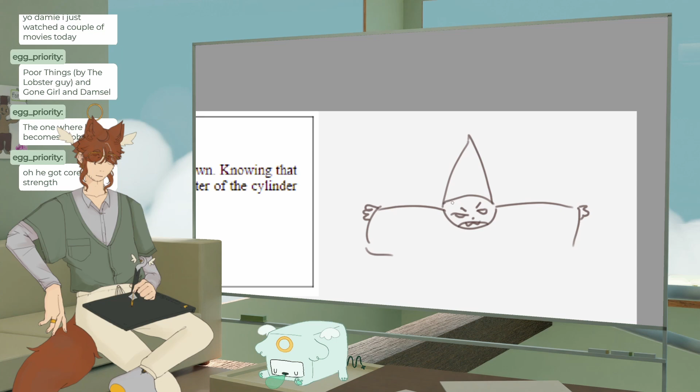Okay, the goal. Here's my goal. Wait, I'm gonna draw my wizard goal. I just love— I was thinking of a metaphor. My wizard goal. My big wizard arms. My wizard hair is all like, wah, because I'm wizarding. Wait, this one's— look a little bit more mad. A little bit more like I care about anything, maybe. There we go. Okay, wizard goal.

Read. Yeah. And write down all things properly.

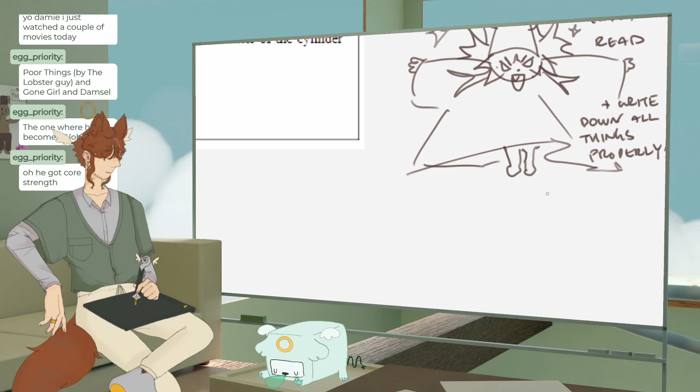I was gonna say my sort of analog, I think, to the issues that I have in dynamics kind of stuff is, I think it's kind of funny because it's like if you were a really good wizard, right? But then it's just like your spell handwriting was just really bad, and so your magic circles got really squished at the end, and it just made them completely ineffective because they got so squished that it didn't work. But you're writing down all the right stuff. It's just like you're trying to get better at just partitioning things out. You're not really getting better at doing the magic part of it. For me, it's like I'm fine at doing the dynamics part. I just forget to write shit down sometimes, or I put things in the wrong— okay, putting things in the wrong direction is more of a dynamics issue, and knowing that, seeing that, is something you need to be able to be good at dynamics. I'm not counting that, but I'm counting just me not writing down the M. Like, okay. Oh, this is such good wizard music too.

A rope is wrapped around a cylinder of radius r and mass m. Knowing that the cylinder is released from rest, determine the velocity of the center of the cylinder after it has moved downward a distance s. Okay, so we have a cylinder.

Let's do work-energy, so we know it's that because we're doing that. State 1 is going to be up here, so V equals 0. And state 2 is going to be down here. We're going to call this S. Make it a little— there we go. V equals what? We don't know what that is.

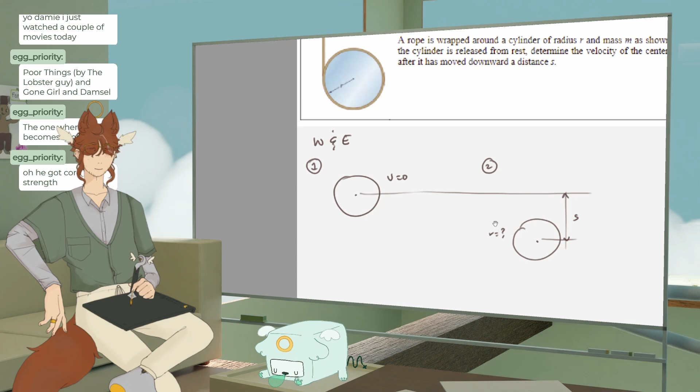Now, it's also going to be rotating because there's a rope wrapped around it. Which is great, love that. I don't know, this is a good problem, I like it. Okay, this is actually great too, because our guiding equation is going to be delta T equals delta VG. We don't have any friction. I mean, it doesn't give us a coefficient of friction. Can't really do anything other than that.

So, we are going to have to do some related velocities and acceleration stuff, but other than that... Okay, let's see, one second. Let me get in the mindset real quick.

Okay, I'm ready, I'm magicked up. I'm gonna write everything so diligently. Alright, T1 equal T1 plus... I already messed up. T1 plus VG1 equals T2 plus VG2.

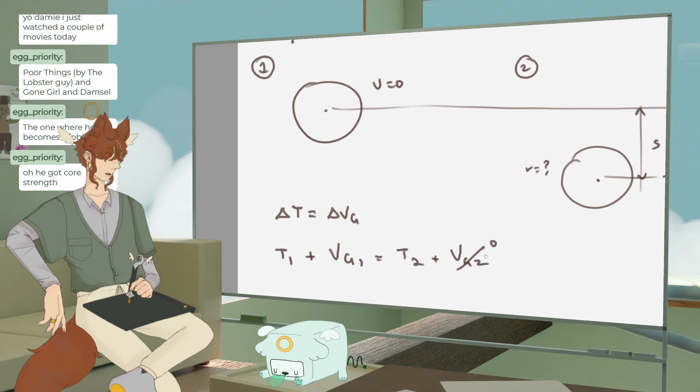Okay, now where do we want to set our datum? I'm kind of feeling we should set the datum at the start. No, let's set it at the end. I just thought about doing everything in negative, and that's gonna mess me up. So we're gonna say datum 0 there, so this one is gonna be 0. It's gonna make sense, like as it falls, it's positive up there and 0.

Okay, so T1, sorry, T1 is 0. Released from rest. So MGS equals 1/2 MV squared plus 1/2 I bar omega squared. That's it.

Okay, now it's a cylinder, so we know it's I bar. And we also know that V is going to equal omega R.

Maybe let's just solve for the velocity of the center of gravity first, and then we can kind of move things around.

Alright, so V squared equals MGS minus 1/2 I bar omega squared divided by M times 2. Now is that gonna mess me up if I leave the 2 there? What if I put a 1/2 on the bottom. Also, I'm gonna put the square root now, because I forgot it last time. But I already wrote the square there, so that was fine before.

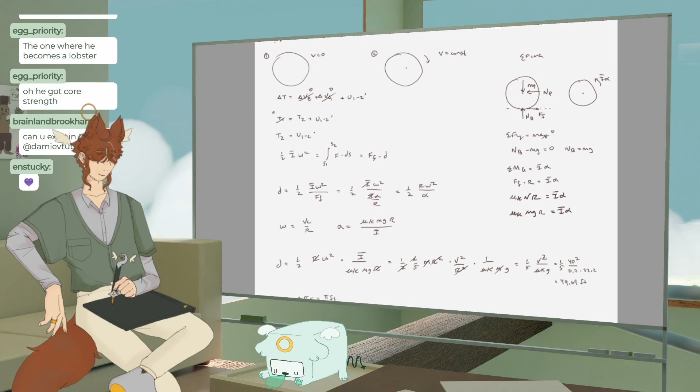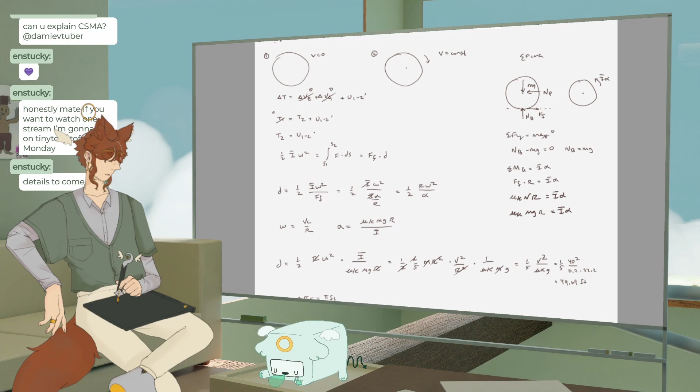Honestly, if you want to watch one stream, I'm gonna be on Tiny Toxic Tofu next Monday. What time? I do have a final on Monday. If it's in the evening, I will not be able to do that. My final is at 7 p.m. PST. But if not, 1 p.m. Eastern? Oh wait, I can definitely do that. That's like early, oh lol, definitely not that.

Yeah wait, let me write that down somewhere real quick, I'll put it on my calendar. Monday, what time is it? 1 p.m., so that would be, let's see, 10 a.m. for me. What are you guys doing, gaming? What did I say, 10 a.m.? Yeah.

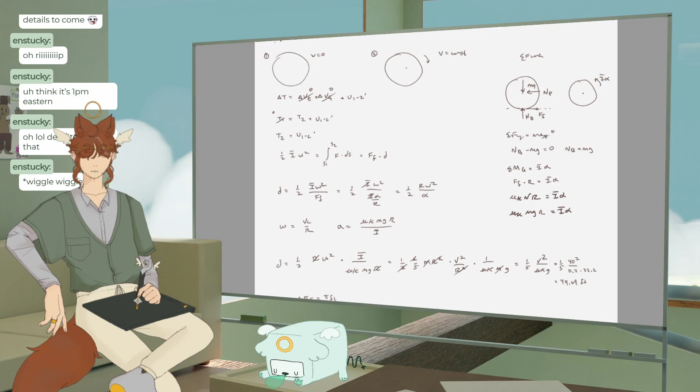Wiggle away. Oh, podcast guest, wait that's so fun, that's great, I love listening to podcasts. Wait, that actually is awesome. I love that because I can just listen to it and I don't have to actually watch something, and that makes it a lot easier for me.